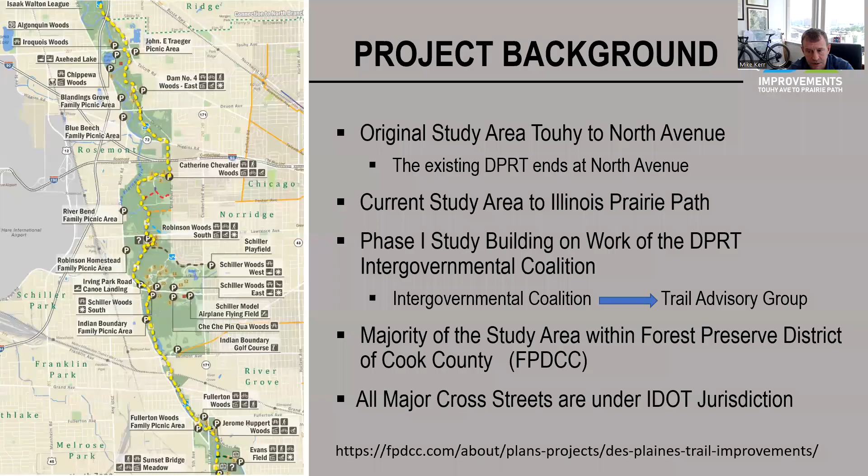So the scope of improvements in this section was trail reconstruction or realignment where the trail flooded many times per year, and new and improved crossings of the arterial streets. We're hoping for grade separations or realigning the path to an existing signal so cyclists can safely cross these major streets. Because of the amount of floodplain, there are portions of the trail on boardwalk and structure, and where we had an opportunity to provide new connections to the trails, we did so.

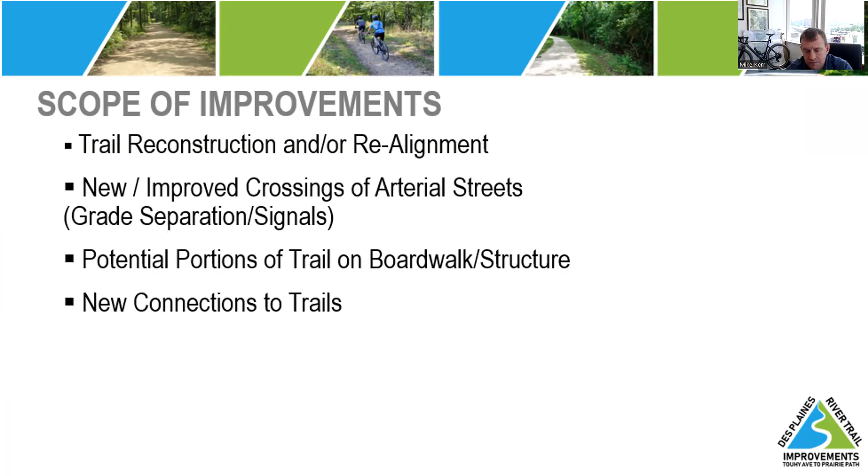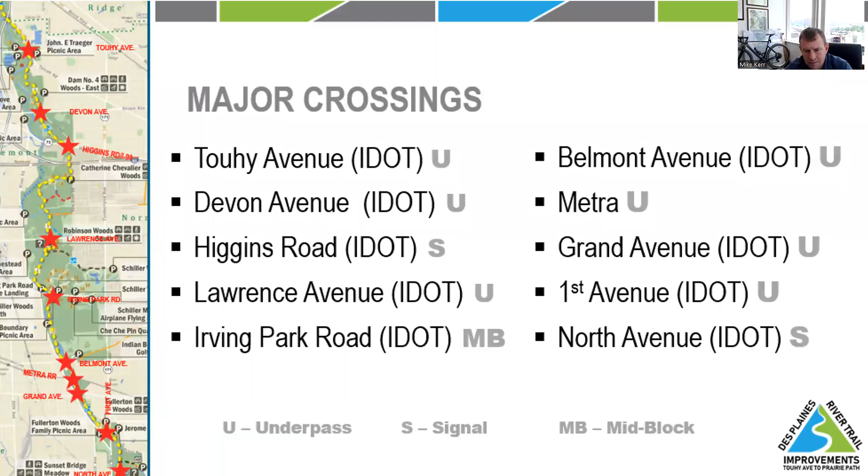Here you can just see some of the underpasses and mid-block crossings that we are trying to eliminate or improve. Again, when the river comes up, it stays up, and many of these facilities are unusable, causing cyclists to just cross at unmarked locations.

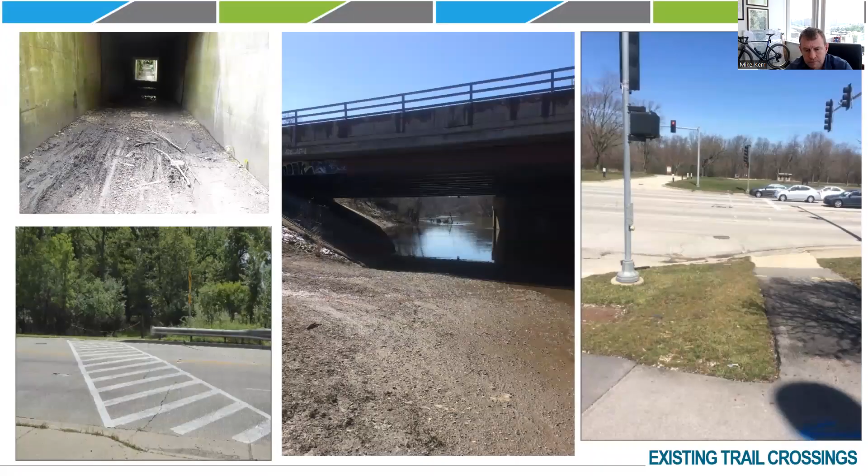At this point, phase 1 was 12 miles long. We felt that was too long to start implementing any of the projects, so we broke it into 3 separate phase 1s: the first from Touhy to Irving Park, then Irving Park to North, and then North on down to the Prairie Path. The reason for doing this is so we could stagger the improvements and try to get some things under construction.

We got design approval for segments 1 through 4, which was Touhy to Irving Park, which allowed us to pursue funding for these sections. Segment 1, between Touhy and Devon, Park Ridge submitted an ITEP application for phase 2 engineering and construction, which they obtained. That section is currently under construction as we speak, and should be done by August of this year.

Should be done by August of this year. Segment 2, from Devon Avenue to Bryn Mawr, Rosemont submitted an ITEP application that was granted for phase 2 engineering and construction. We had the pre-con for that last week, so that will be shortly starting construction and again be completed by August.

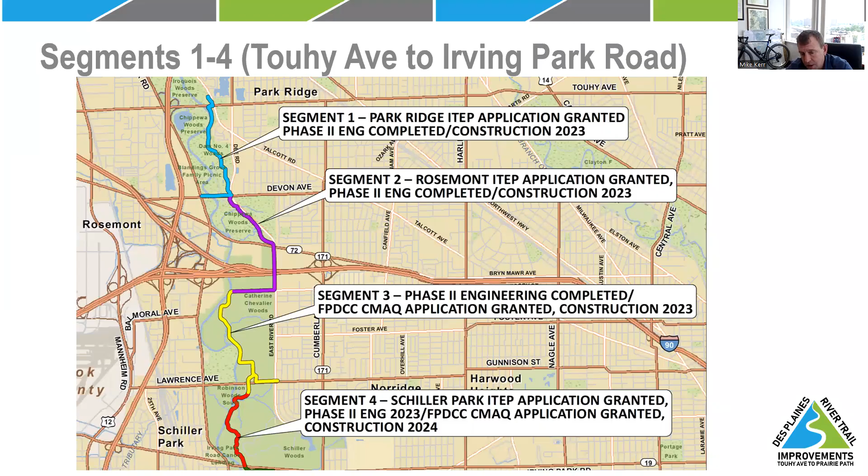Segment 4, Schiller Park applied for the ITEP application and received phase 2 engineering. We are still waiting for those agreements to be approved. The good news here is 3 of the 4 segments in the north part are under construction and will be completed this year, which we felt was important.

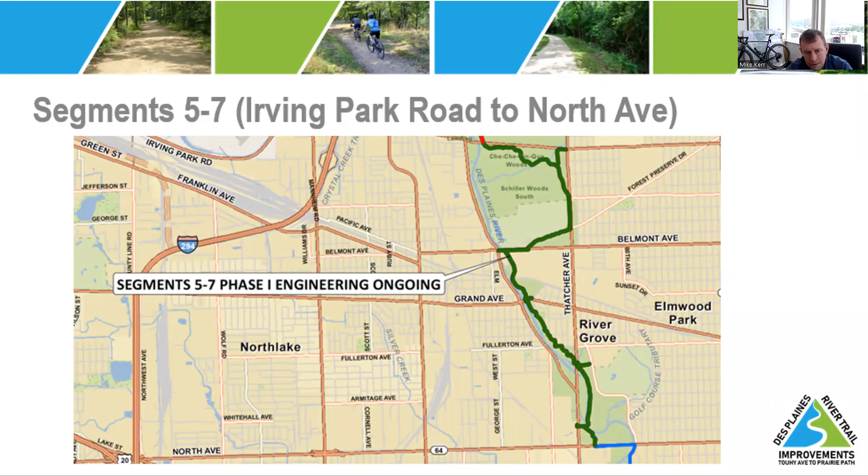Next slide. So segments 5 to 7, from Irving Park to North Avenue, are still in phase 1 engineering. We expect design approval by the end of this year. There are some ARC sites and other sensitive environmental resources that require this one to maybe be on a different track than the first 4.

Next slide. And then finally, the last segment is segments 8 through 10, from North Avenue to Madison. As it turns out, this section ends up being largely on River Forest streets. The section of Forest Preserve between North Avenue and Madison is some of their most sensitive holdings, so it was not desirable to go through there.

So we're looking at 2-way cycle tracks and bike paths, along with shared lanes along Thatcher down to Madison, a cycle track on Madison, and then a standalone project that the Village of Forest Park is doing along Van Buren to get us down to the Prairie Path. That's my presentation. Like I said, we hope to have at least 3 of the 10 segments done this year.

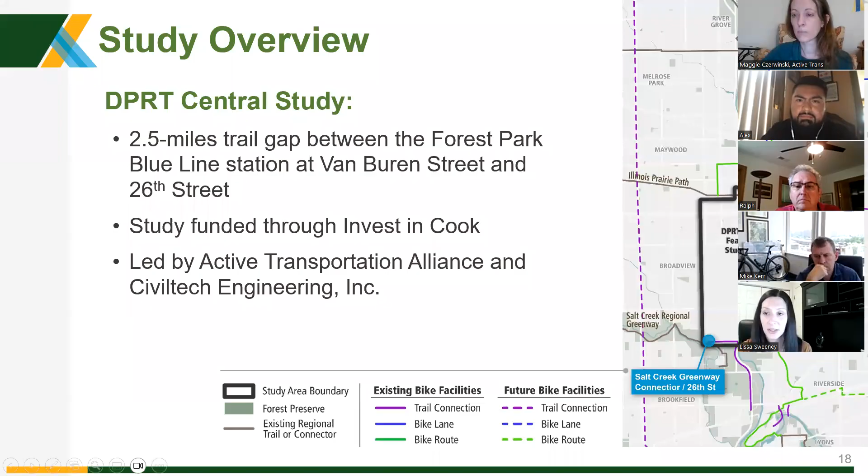It's currently ongoing, but we are planning on wrapping up the feasibility study this summer. The central study focuses on the portion just south of what Mike had discussed. It intends to close the 2.5-mile trail gap between the Forest Park Blue Line Station and 26th Street near the Salt Creek Trail. It's funded through Invest in Cook, and it is being led by Active Transportation Alliance with our support.

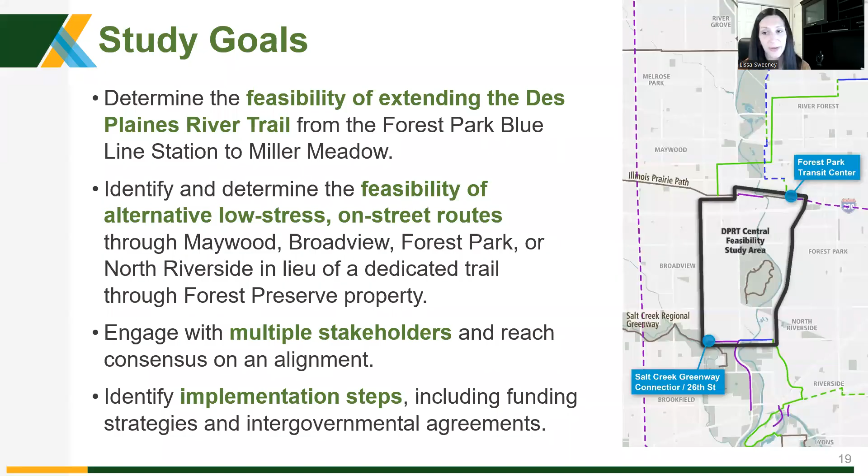The overall goals of the study are to identify and determine the feasibility of either a dedicated trail through Forest Preserve property, or alternative low-stress on-street routes through Maywood, Broadview, Forest Park, or North Riverside. It was also important to engage multiple stakeholders throughout the study and to identify implementation steps.

During this time, we've also had multiple steering committee meetings, pop-up meetings, and most recently a public meeting. We are currently wrapping up the final report, and we're working with the Active Transportation Alliance and Cook County to move the project to the next stage.

So just briefly in terms of community engagement, in addition to our steering committee, we did attend some local events last fall to hear from the community. This included a party for the preserves as well as Tour de Proviso.

And at those meetings, we promoted both our wiki map and our survey to get more information from the community as to what issues are out there today and what they'd like to see in the future. So at these events and through these tools virtually, we had 325 survey respondents and over 150 comments about routes, difficult crossings, and destinations.

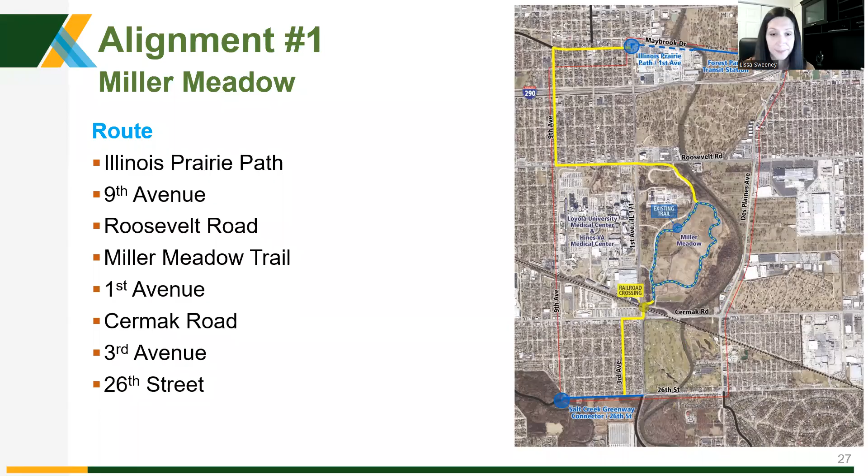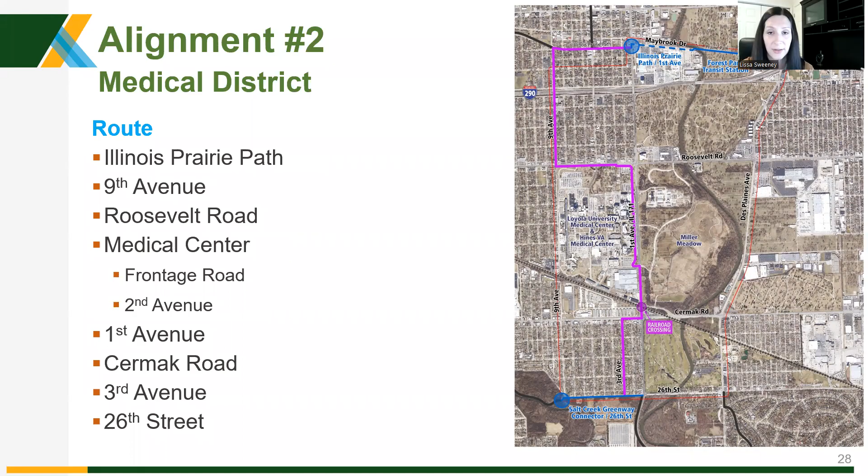Alignment 2 takes a similar route on the northern and southern ends with 9th Avenue and 3rd Avenue. But instead of connecting to Miller Meadow, we connect to the medical district and use the frontage road within the medical district, as well as 2nd Avenue, then come out around 17th Street and connect to 1st Avenue there. The blue circles represent the connection points where we're hoping to connect the destinations.

Alignment 3 utilizes Des Plaines Avenue, where there is an existing bike route, although from community feedback not a very comfortable one. This would potentially entail a road diet, reducing the number of lanes from 4 to 3, in order to provide either a bike lane or a side path along Des Plaines Avenue, then connect to an existing bike lane on 26th Street.

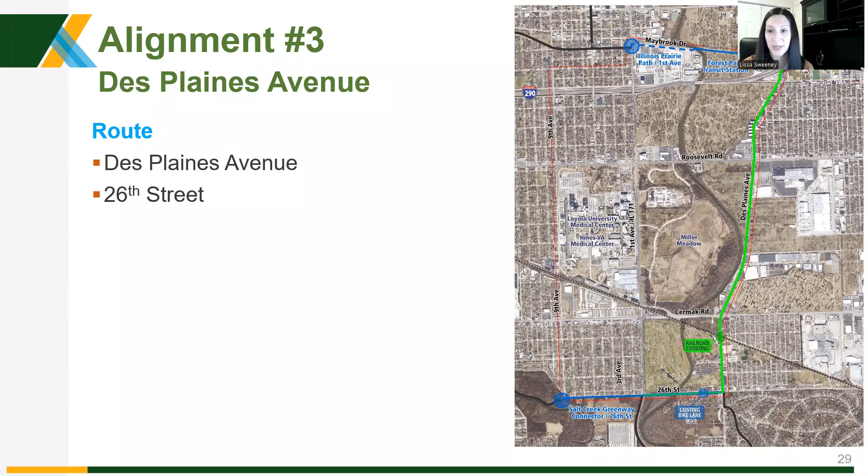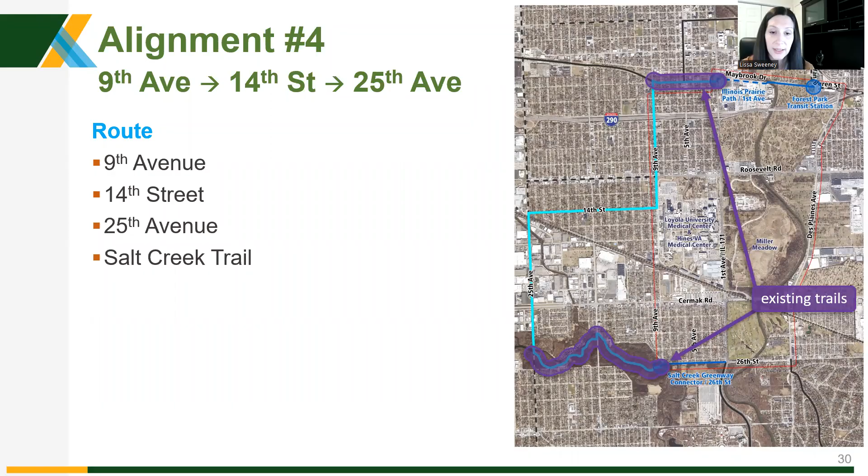Alignment 4 connects to existing trails and utilizes the Salt Creek Trail to a greater degree, moving or connecting to it further west. There's also a current programmed side path on 25th Avenue, as well as a planned on-street bike route on 14th Street, so our connection would just be along 9th Avenue.

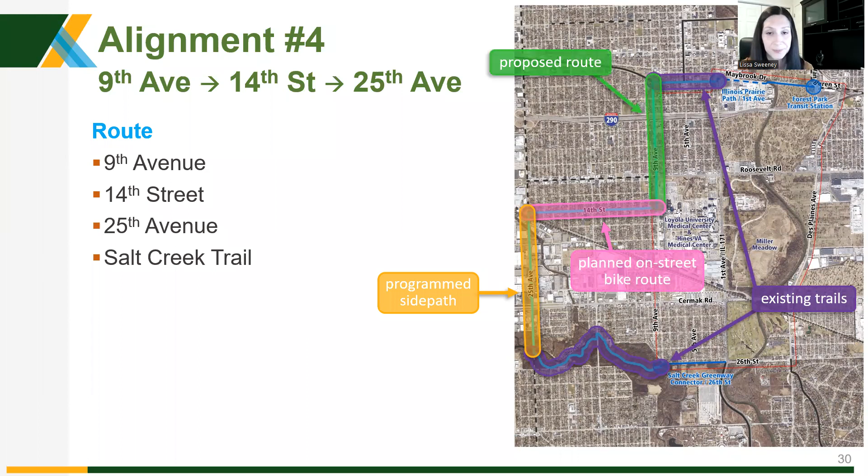Once we had those 4 alignments, we assessed them using evaluation criteria which reviewed user experience, community connectivity, environmental considerations, right-of-way impacts, engineering feasibility, and other factors. Overall, alignment 2, which went through the medical district, had the best overall score.

Alignment 1 utilizes the current trail in Miller Meadow but does not have 24-hour access. Alignment 4 connects to planned and programmed bike routes and would have a fairly low cost to implement, but is less of a direct connection to the study destinations. Alignment 3 on Des Plaines Avenue, while one of the most direct options, would be the most complicated and expensive due to the road diet and potential right-of-way impacts.

So with all that being said, what we heard from the community and from our analysis is that all of these have merit. Each alignment connects to different destinations and provides opportunities for different types of trail users.

So instead of just selecting one, we've prioritized them, with the first priority being alignment 4, essentially the connection down 9th Avenue to 14th Street, followed by the alignment through Miller Meadow and the medical district, and then the Des Plaines Avenue alignment.

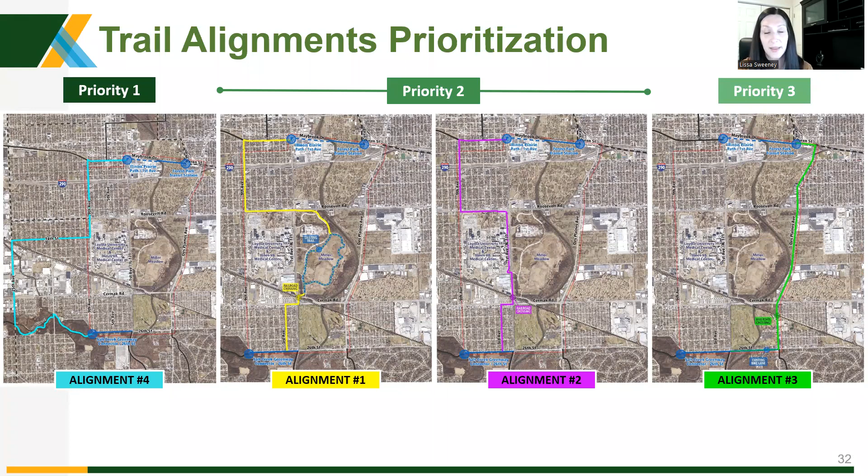Taking a step back and looking at all these alignments together, you can see how they build off one another, but also serve different purposes and connections to the larger trail network to the north and south.

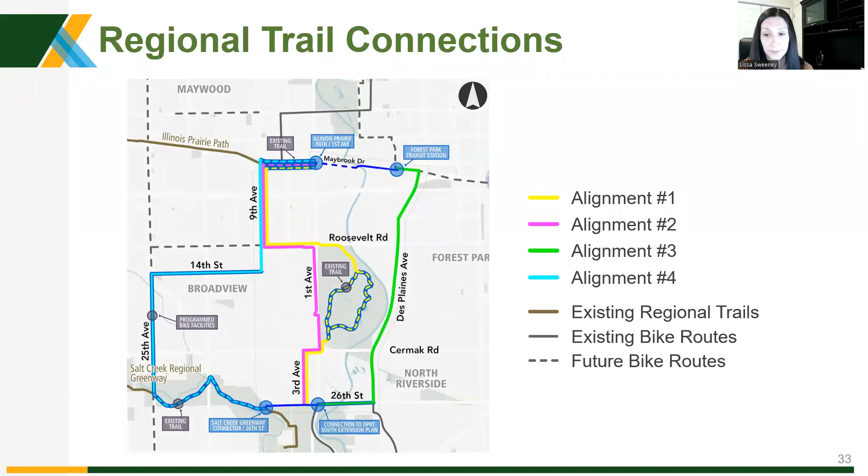We've also developed a few location-specific concepts to show on-the-ground improvements and connection points at a few more complex intersections or crossings where we've heard a lot of feedback from the community. For the sake of time, I'll just touch on a couple of these, but they are available on the project website.

This first one, I believe Ralph will speak to a little bit more, but there is a current Cook County project at Maybrook and First Avenue, which repeatedly comes up from the community as a dangerous crossing without any east-west connections.

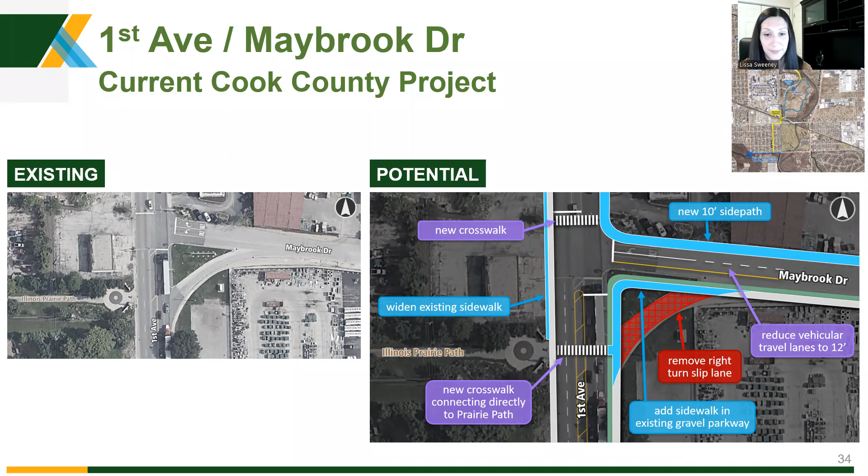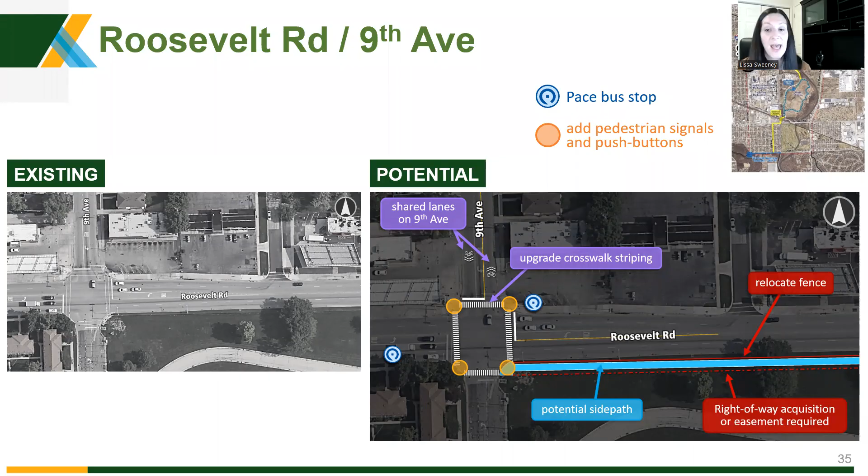Then at Roosevelt Road and 9th Avenue, which would be utilized for at least 2 of the alignments, we propose upgrading crosswalk striping, adding pedestrian signals and push buttons, and adding a side path on the south side of Roosevelt. This would require some right-of-way acquisition or easement to shift the fence by Hines VA.

So you'll see here a rendering of that specific location, showing the upgraded striping as well as the side path on the south side of Roosevelt.

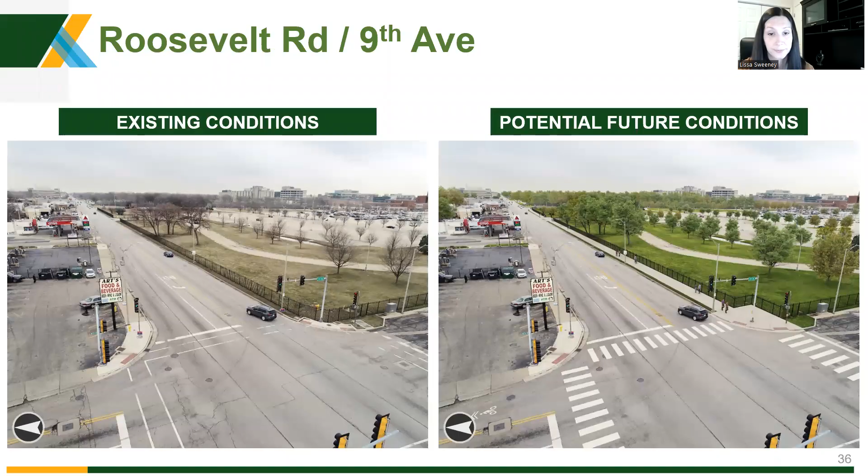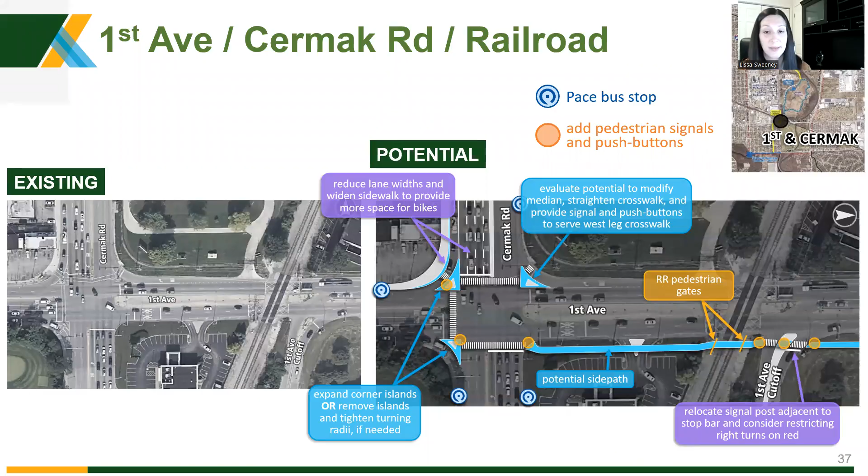And then the second location we'll look at is a concept at First Avenue between the railroad crossing and Cermak. You can see a proposed side path on the east side of First Avenue, along with additional pedestrian signals, push buttons, and exploring the possibility of reducing lane widths on Cermak to accommodate a side path on the south side. Here's another view via the rendering, facing south, showing the side path going down First Avenue on the left-hand side, crossing over the railroad tracks and connecting to Cermak.

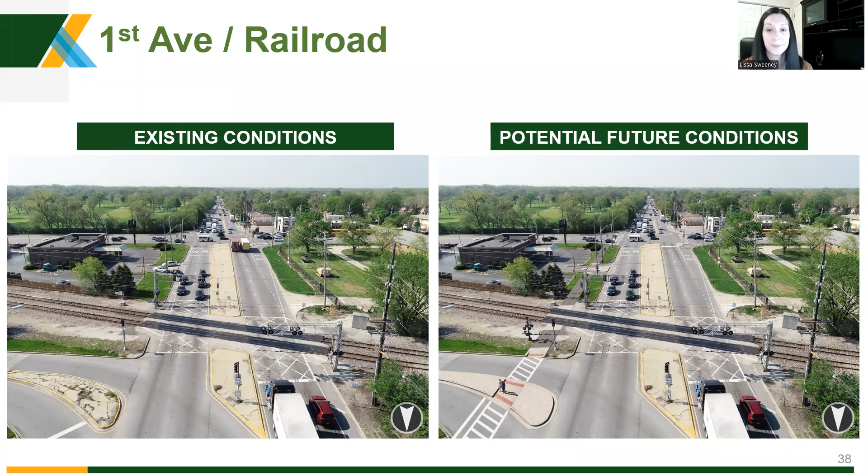So then just looking at next steps again and our timeline, we are drafting our final report right now and expect it to be distributed this summer, and more information is available on the project website. So thank you again, and we look forward to answering some questions at the end of the presentation.

Great, thanks, Lissa. And so with that, let's bring on Ralph, who will speak more about the portion of this project between the CTA station and the Illinois Prairie Path.

So Ralph, we have to get you unmuted. Uh-oh. There we go, I think. Okay, am I in now? There you are. Hi, Ralph. Hello, everybody, good afternoon. Maggie, can you hit the first slide, please?

In the central study area, gaps exist between the Prairie Path, Salt Creek Path, CTA, and the proposed Thatcher or Des Plaines River Trail. Why close these gaps? Well, in real estate, I used to say location, location, location. Now I would say safety, safety, safety. It's a matter of providing safe passage for bikers and walkers where we can. We want to provide safe crossings at arterial roads, improve trail connections between the suburbs, improve access to mass transit, get bikes out of traffic, put them on off-street paths when we can, and get them into bike lanes when we can, and just increase bike ridership in general, whether for recreation or commuting to work. Next slide, please.

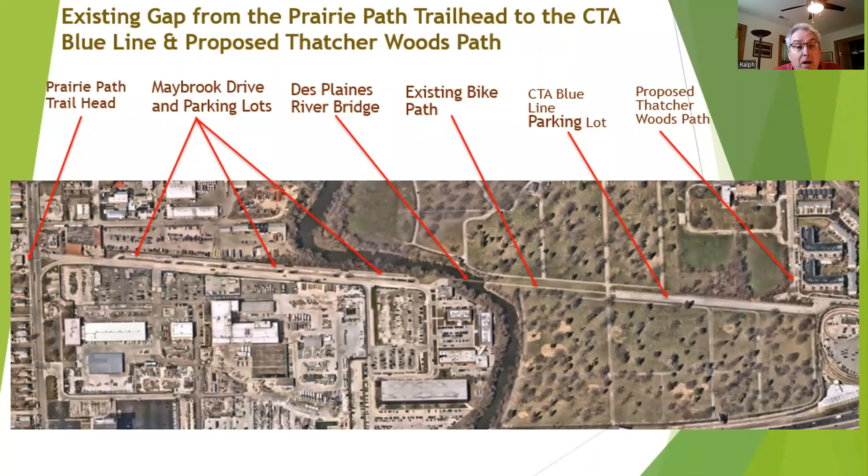Next slide, please. How to close this gap: we've been working with Cook County Commissioner Brandon Johnson for the last six years on this, along with a group of local citizens. What we've come up with, if you follow the dashed line, is to extend the trail that goes over the river to the CTA parking lot with a bike path going to the north half of the county parking lot, and at the end, cutting over to Maybrook Drive in about a 10-foot wide path running to First Avenue. This isn't the tricky part—the tricky part is our next slide. Maggie, please.

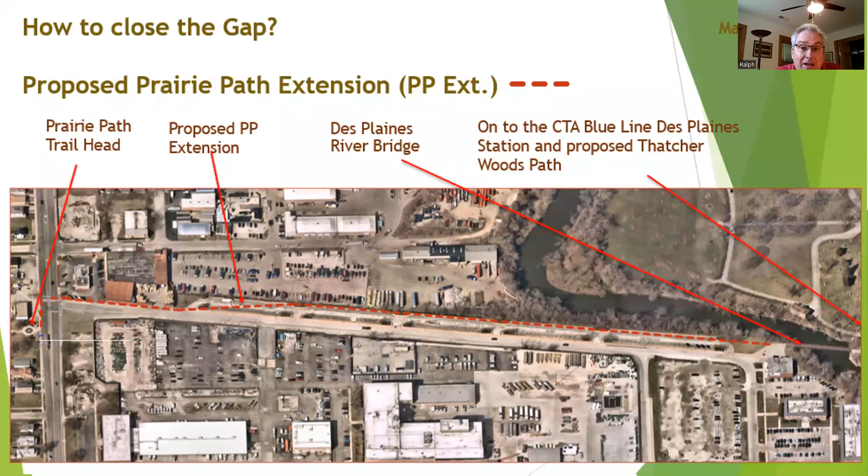What can I say about the intersection at First Avenue? We would like to create a safe crosswalk across First Avenue. Right now, there is no crosswalk. The light there is for a left arrow and a right arrow, and so either way a biker comes down there, they're violating the green light by being there, because traffic never stops.

Can you see in the small triangle, there's a sign for the Cook County Courthouse? It's something else we found to be dangerous because it blocks the view of cars and bicyclists alike so they can't see each other beyond the sign. And if somebody is using the right turn lane off of First Avenue, sometimes at higher speeds, they may not see a bicyclist behind the sign, and vice versa.

The cyclist may not ever see the automobile as well. Right now, CDOT and IDOT are discussing a new intersection for this area. One potential one that we liked was putting the crosswalk at the north side of the street and creating a widened sidewalk going from that crosswalk west of First Avenue down to the trailhead for the Prairie Path. On the opposite side of the street, a new 10-foot side path would be built from First Avenue to the courthouse parking lots, which we hope will create a path that runs all the way to the Blue Line and to the Des Plaines River Trail.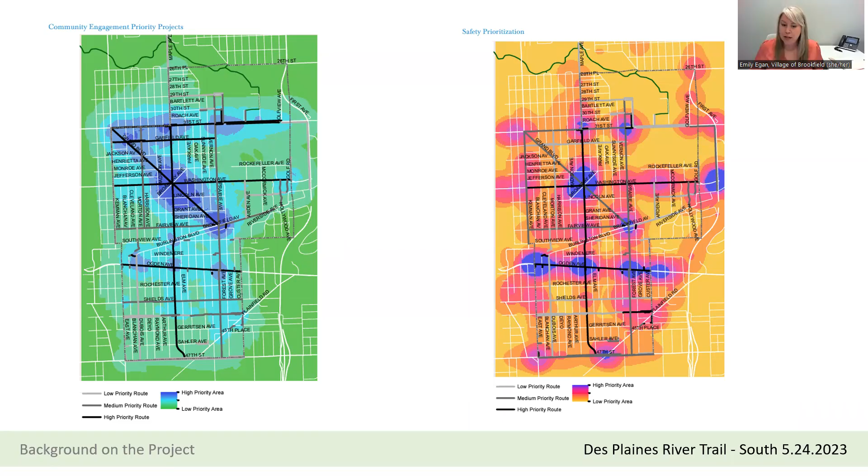Safety, I like what you said, Ralph. So yeah, there was a lot of good engagement we saw in 2017, and we saw that there was a clear need for some improvements, and we were really happy to see that a lot of other communities agreed with that.

The Forest Preserves of Cook County engaged CMAP through the Local Technical Assistance Grant application to do a study in 2019, after the Brookfield study, that looked at the feasibility and location of this. On your right hand side is the Brookfield plan specifically, but a lot of other regional plans show lots of engagement and a clear understanding that this is what the community wants, and plans are recognizing this.

So we were very excited. Very shortly after the CMAP and the Forest Preserve Plan got adopted in 2019, we entered into an intergovernmental agreement. This agreement was to move beyond the plans and go through the phase 1 engineering for implementing these plans, for getting something done that it was clear there was a consensus to do. That intergovernmental agreement said that we would all work together with a professional consulting and engineering firm.

We chose to work with CIORBA. That's the firm guiding all of the agencies on this list: Village of Brookfield, LaGrange Park, Lyons, Riverside, and the Forest Preserves of Cook County. CIORBA is guiding us all through how to implement these plans that we've all agreed on.

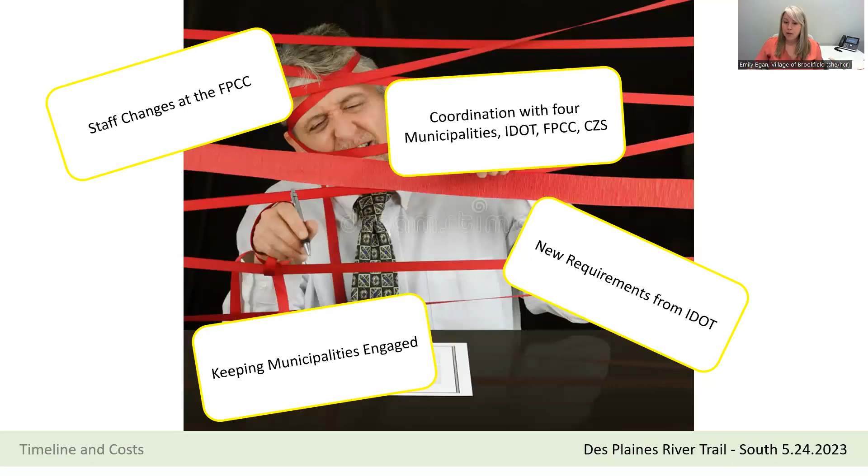So all of this adds up to limited staff capacity for Brookfield, and for all of the other agencies involved. A delayed project means financial resources are limited. This is at least two years behind schedule, which means two years of meetings with CIORBA. And to be frank, we are over budget, and we see this as a potential barrier to getting this project to the finish line.

But I don't want to focus on the challenges. I do think that we have a path to success.

We are extremely thankful that we have recently been in conversation with Cook County's Department of Transportation and Highways. That organization recognizes the benefit of this project—not only the regional benefit, but the statewide benefit, honestly. They've been extremely supportive and encouraging, and we're working through the commitment they've offered to bridge the funding gap between what was initially discussed with all those partners and what is needed to get it to the finish line. So we're really excited for that.

We also have support from Active Transportation Alliance, events like this bringing awareness, elected officials, and Cycle Brookfield. Cycle Brookfield is a nonprofit bicycle advocacy organization here in Brookfield, and they do so much for the community. They're also really supportive of this project and encouraging.

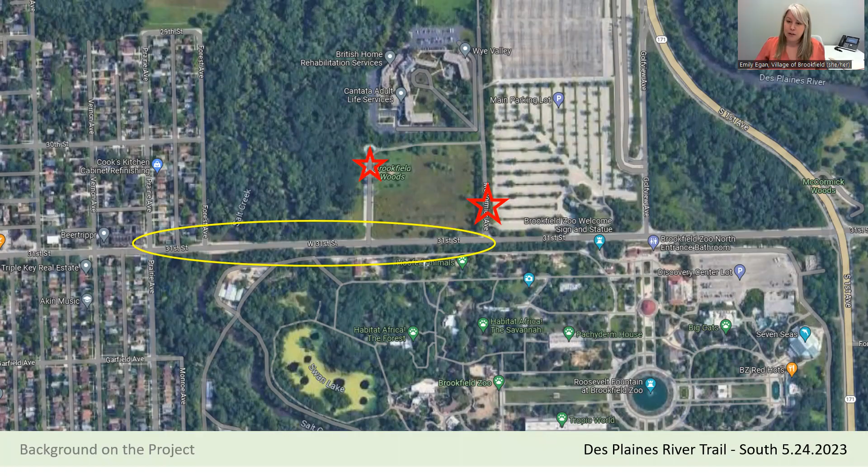On that half mile, on 31st Street, there is already a pedestrian and bicyclist bridge that was built when this roadway was constructed with that in mind, but it is not accessible. It is not maintained. It's a dead end. There's no connection there.

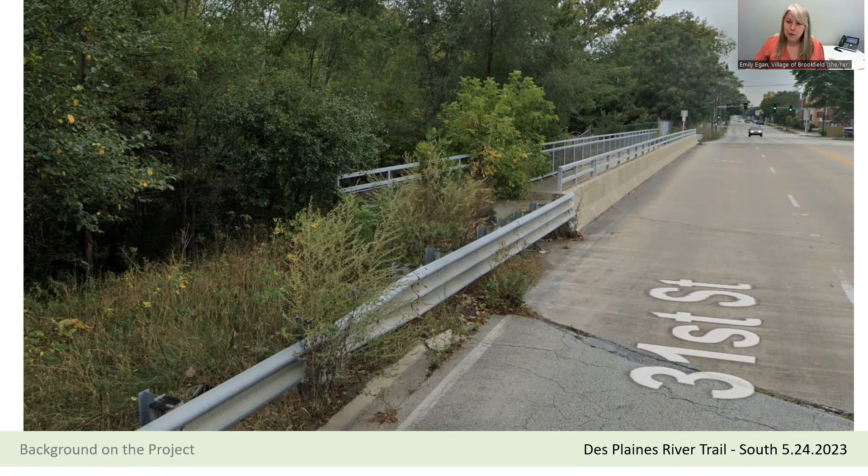So working through this—why are we doing this? We're making it safer and more convenient for folks to get to the bicycle entrance for the zoo, and also the Forest Preserve's easternmost trailhead. You can see there's already a path where folks are walking and biking to this destination, but unfortunately without the infrastructure support to make it safer and more convenient.

So to recap, we're working very diligently on all of these portions of the project. Right now, Washington Avenue, which connects to all of these other regional areas, is being constructed as we speak. We're adding bike lanes to the north and south side of Washington Avenue. That's a locally controlled street by Brookfield, so it was able to move forward a little faster than other portions.

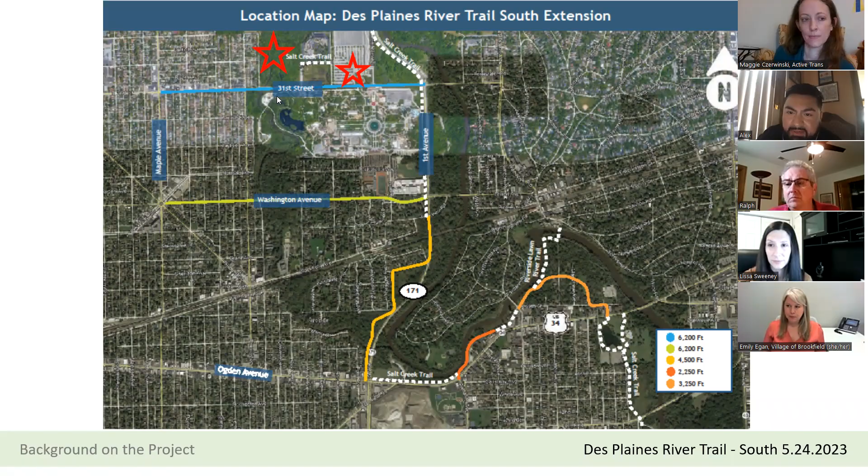That was great. Okay, taking it to the north section, a question for Mike. Hi, I see all the trail work happening near Touhy and Devon. Is the plan to pave the trail?

Hi, no, that's segment 1. We had a long discussion with the Forest Preserve District about whether or not this trail should be paved or remain unpaved. We ended up developing design criteria to leave it unpaved, except at the immediate approaches of intersections where there are ADA tiles, where the grade exceeds 4% to avoid washouts, and where the path is inundated for significant amounts of time with floodwater and therefore washes away the stone. So those would be the three areas on the trail that are paved. Everything else will remain as stone, but it's important that the stone meet ADA requirements, as that's key to some of our funding structure.

I also think the last question was probably for me regarding River Forest, the very south end of our study. The reason that is on-street is because you are correct, the Forest Preserve is very nice in that area, too nice for a path. In the estimation of the resource people at the Forest Preserve, there's lots of threatened and endangered species in there, and other valuable resources, so they did not want a new path going through that area.